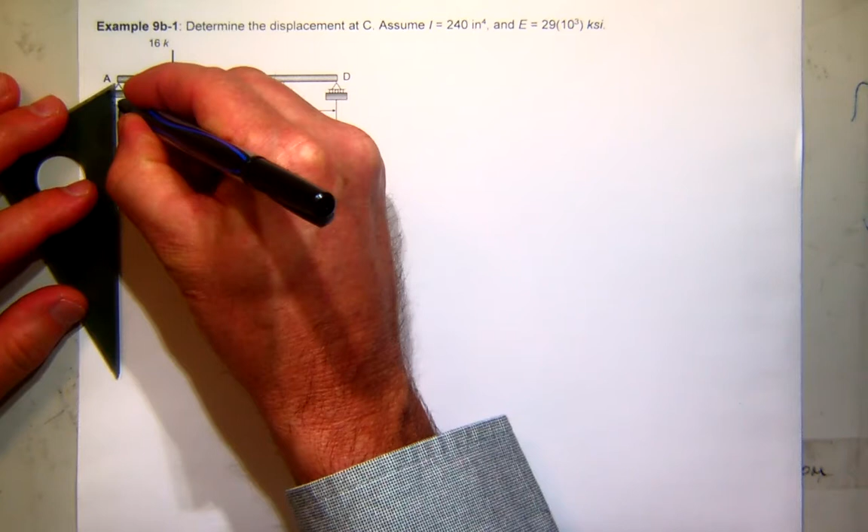So remember, if we're going to do virtual work for this particular problem, I'm going to have to write an equation for moment that's valid across the whole structure, and then a set of equations for the virtual load. So let's start with what I'll call the real moment first. So to find the real moment, I'm going to need some reactions. So let's start by assuming I have a value here for AY and DY. Let's find those reactions.

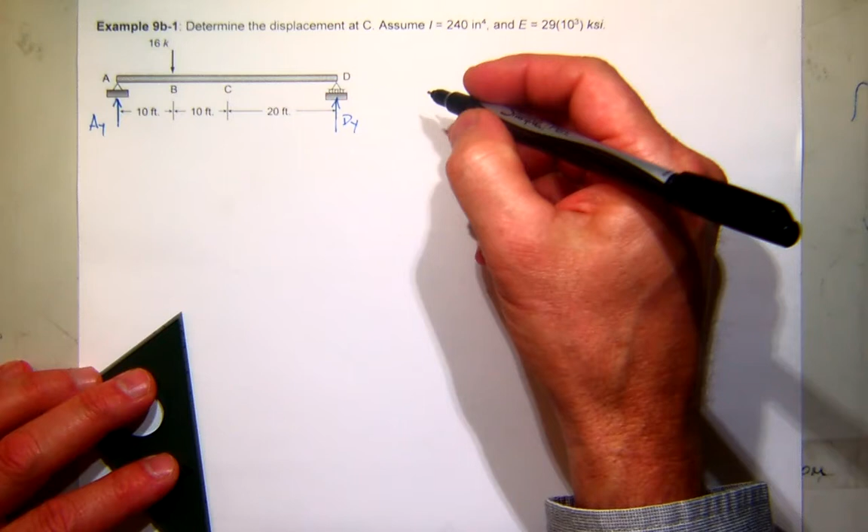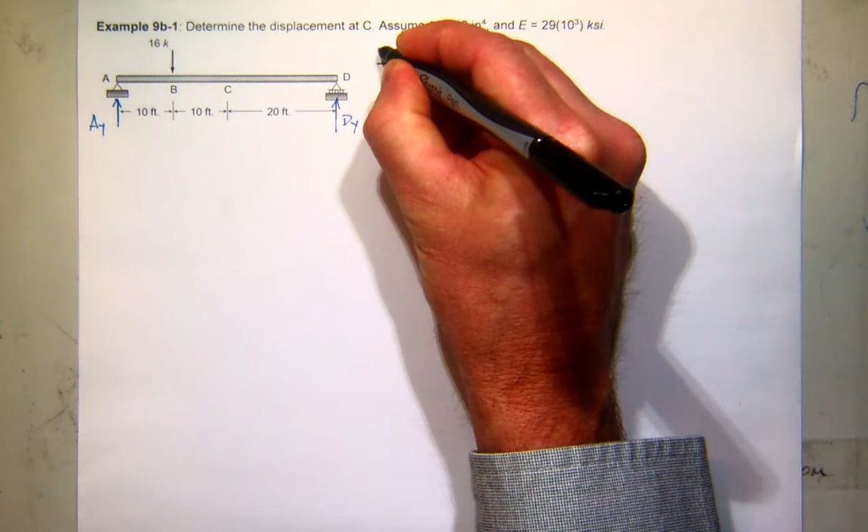So to find my reactions, I think I'll start by summing moments about D. That should help me find AY. And then we can sum forces in the Y direction. We can find DY. So first, if we sum moments about D, make sure we're in equilibrium. I'm using right-hand rule, so this 16 kip force creates what kind of moment about D? Positive. So I got a force of 16 kips and a distance of, looks like 30 feet.

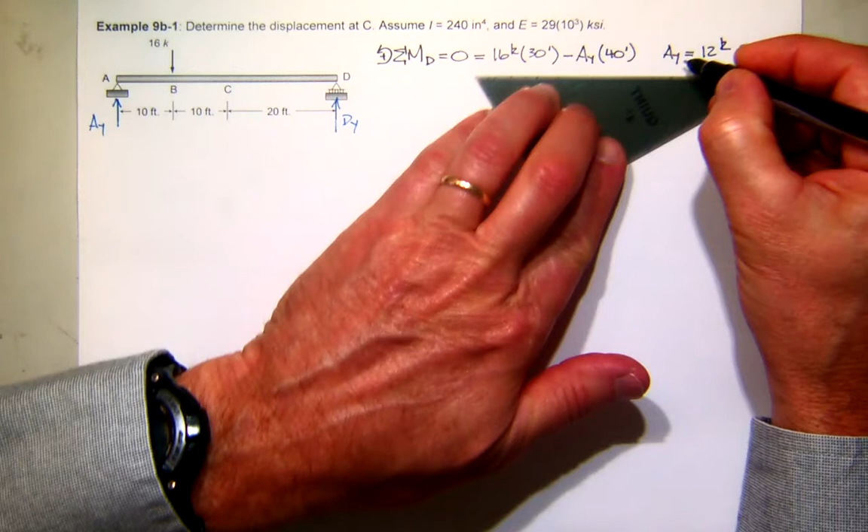And then my reaction at A creates what kind of moment about D? Positive or negative? Negative. So that's AY, and that has a moment arm of 40 feet. So it looks like AY is going to be 12? 12 kips. And then if I sum forces in the Y direction, I should be able to find DY pretty

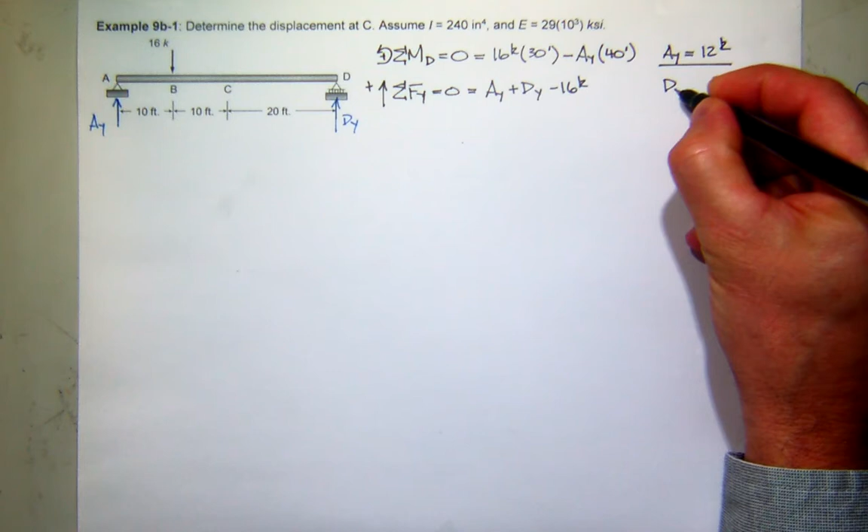easily. So again, summing forces in the Y direction, making sure it's in equilibrium. I assumed AY was up, that DY was also up, and that that 16 kip force was acting down. So it looks like DY is 4. Any questions about that? So next, now that I have all these reactions, I want to write equations for moment.

Can I write a single moment equation for this beam? No. So I'm going to need to write one that's valid from A to B, which is 0 to 10, and then a second equation that's valid from B to D, which would be from 10 to 40. Everybody see that? So I'll just call this section real moments. And we'll start with the first section. So this will be where X can go from 0 to 10.

So I'll cut the structure at some distance X in that range. We know AY, already solved for that. That was 12 kips. And then I'm also going to assume positive bending moment. So from that, I can easily find the internal moment. So I'm going to sum the moments at this cut that I made using method of sections. Make sure it's in equilibrium.

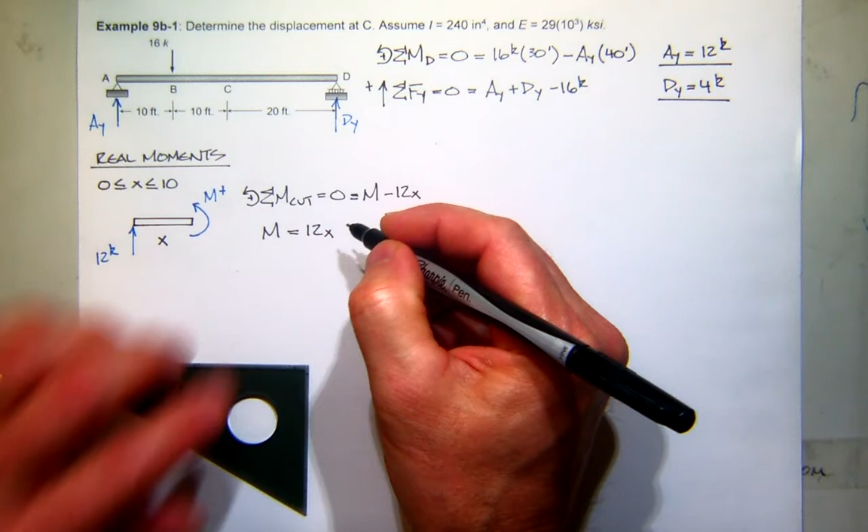The internal moment is positive, and the moment about the cut from the reaction 12 is negative. So that's pretty easy to find. Looks like the moment is equal to 12x. Any questions about that? Pretty straightforward. So let's do the next one.

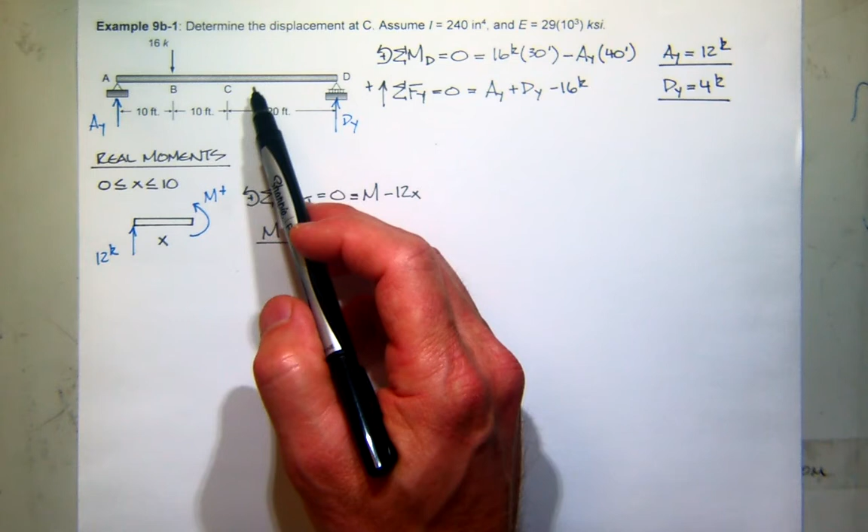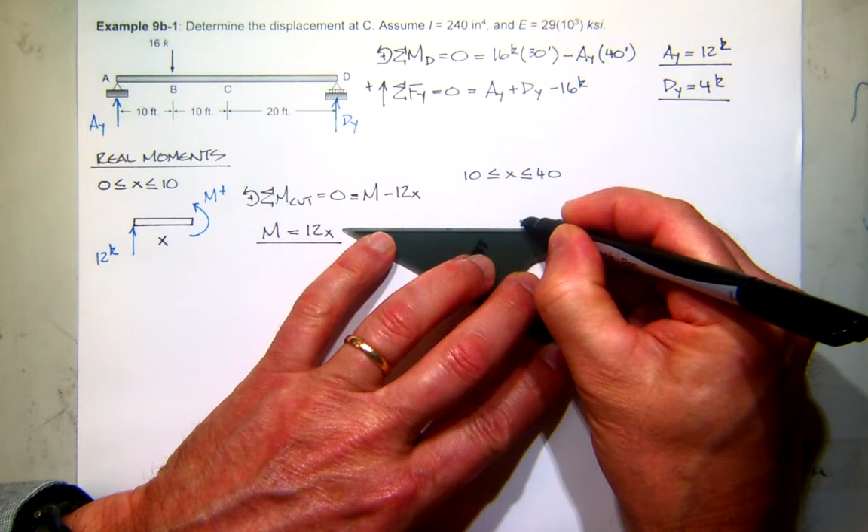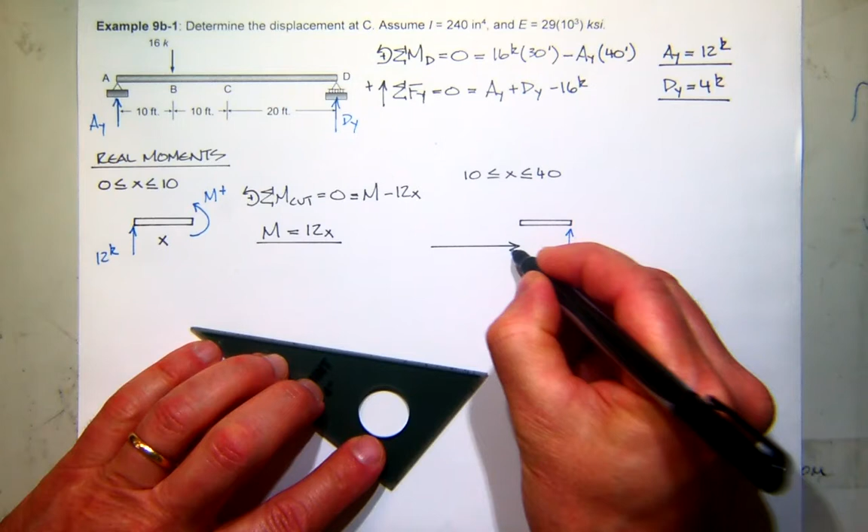Let's make a cut somewhere here between B and D. I think it's going to be easier to work the right-hand side. So this will be the moment that's good from 10 to 40. So again, I'm going to make a cut. That's the right side, so my reaction there is 4 kips. So again, the distance to the cut is x. So what's the distance of this little segment? The total length minus x, which is 40 minus x. And then again, I'll assume positive bending moment at the cut.

And I just need to solve for that. So again, I use method of sections. Now that I've done that, I'll just sum the moments at that cut that I made. Make sure it's in equilibrium. This internal moment with my sign convention is negative. And then this 4 kip reaction is going to create positive moment, 4 kips times a distance of 40 minus x. So solving for the moment, I'll just go ahead and run that through. So I'll end up with 160 minus 4x.

Now I can check these, right? I know the moment at 2 places. What's the moment here at A? 0. And that's at x equals 0. So I use this equation, and you can see if I put in x equals 0, I get 0. So that checks.

What about here at D? I also know the moment is 0. That's at x equals 40. So using my equation for that range, plug in x equals 40, you can see I get 0. Now the one other place to check would be at the point they share, which is x equals 10. So if I put in 10 here, what do I get? 120. If I put in 10 here, what do I get? 120. So I feel pretty good about these moments.

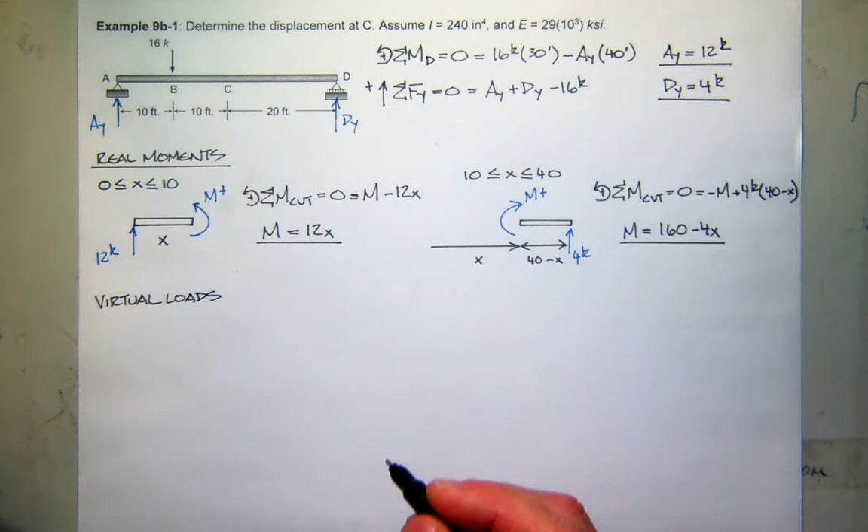So the next thing I need to do is my virtual system. Now to do my virtual system, I have a completely different problem to solve. So I'm going to first draw the frame. I'm going to have a reaction at A, just like I had before, and a reaction at D. But what is the load on the virtual beam? Remember, I'm trying to find the displacement at C, which is right here in the middle. So now I'm going to have a virtual load of 1 right in the middle of the structure. 20 feet and 20 feet.

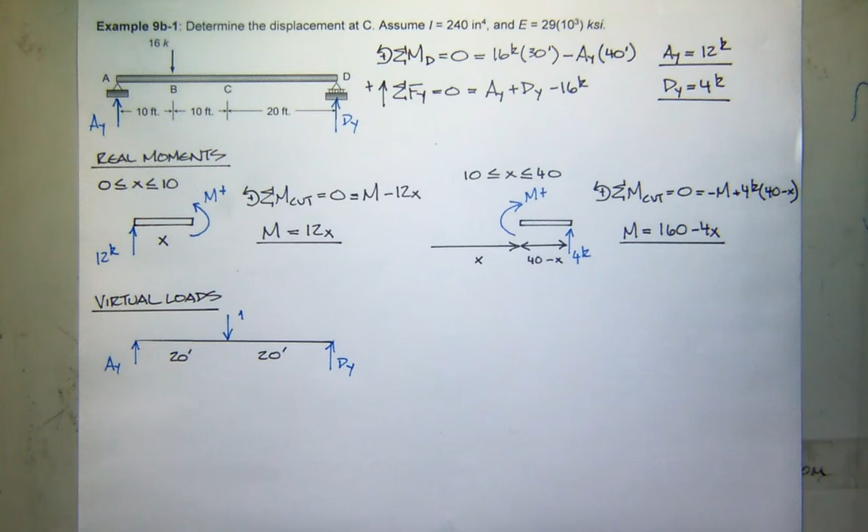Everybody see that? So how many virtual load equations am I going to have to write here? 2. One that's from 0 to 20, and a second one that's from 20 to 40. I'm going to follow the same strategy I did here. I'm going to cut in the first segment and use the left side, and then when I cut in the second segment, I'm going to use the right side. So I'm going to need both my reactions to get started.

I think we can probably already guess what the reactions are going to be. What do you think they're going to be? A half and a half. If you wanted to shortcut that and you felt good about it, you can. I won't do that. Just to be complete, I'll go ahead and solve the problem. So I'm going to sum moments about D, make sure I'm in equilibrium. And when I do that about D, the unit load 1 creates positive moment, and AY creates negative moment. And as we suspected, when you solve for AY, you do get 1/2.

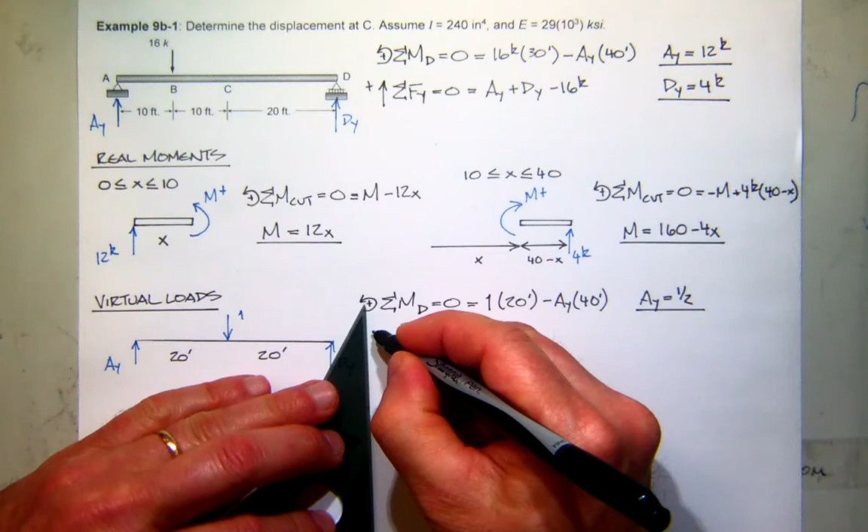And then if you sum forces in the Y direction for this free body, and also make sure it's in equilibrium, you're going to find that AY acting up plus DY acting up, 1 is acting down. And again, as we talked earlier, you find the reactions. So now that I know those, I'll follow through with the strategy we discussed.

So the first one will be looking for the virtual moment between 0 and 20. So I'll cut the structure, and we will look for the internal moment. Now this is the virtual moment, so I'm going to use the lowercase m. And then I know my reaction at AY is 1/2. It doesn't have a unit because our virtual load doesn't have a unit. And again, that will be at a distance x.

So when I sum moments at the cut and make sure it's in equilibrium, what do I get? Well, I have my internal moment, which is positive, and this force of 1/2 creates negative moment with a moment arm of x. So my virtual moment is just x over 2.

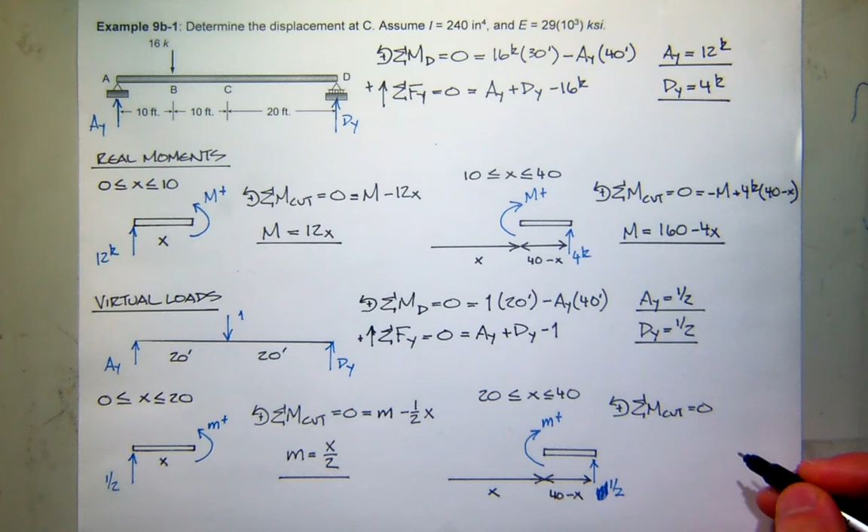So again, up to the cut from the left side is an arbitrary distance x. So what I'm left with on the right-hand side is the length minus x, which should be 40 minus x. And when I sum moments for this free body and make sure it's in equilibrium, what do we get? Well, we get the internal moment is negative. The 1/2 force creates positive moment about the cut, and it has a moment arm of 40 minus x. So when I solve for the internal moment m, I may just leave that 1/2 there. So I'll just say 1/2 times 40 minus x.

Now before we move forward, we can again check these. So in this virtual system, we should also know something about the moment at A and D. Do we know what's the moment at A? It's a pin connection. Should be 0, right? So if I put in x equals 0 here, I do get 0, so that's good. At D, which I know is a pin, I should also get 0 moment. That's at x equal 40. And again, if you come over here and you put x equal 40, 0.

Now these two share a value at 20. So when I put 20 here, I get 10. When I put 20 here, I get 10. So it seems like everything matches up. So I feel pretty good about my moments. So any questions about that? So really, you've done the hard work, I think. And now all we need to do is piece them together and form what I like to call the virtual work equation. So let's do that.

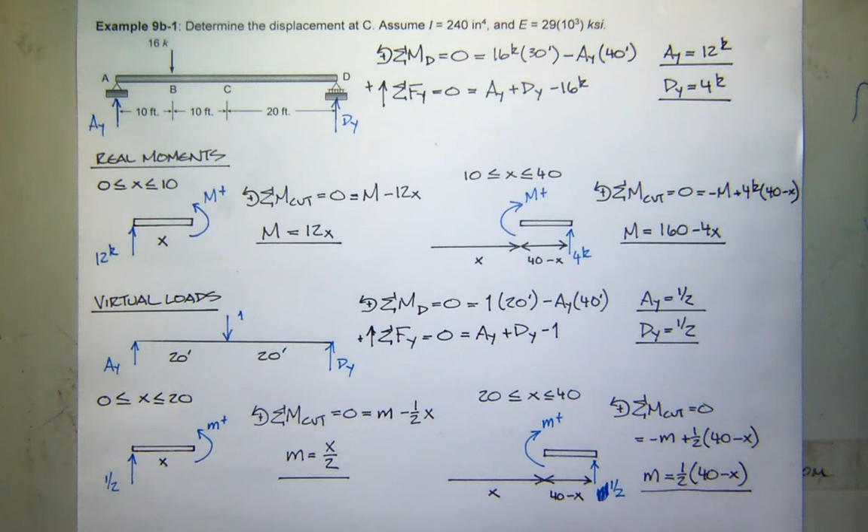Drop my pen. Hang on a second. Okay.

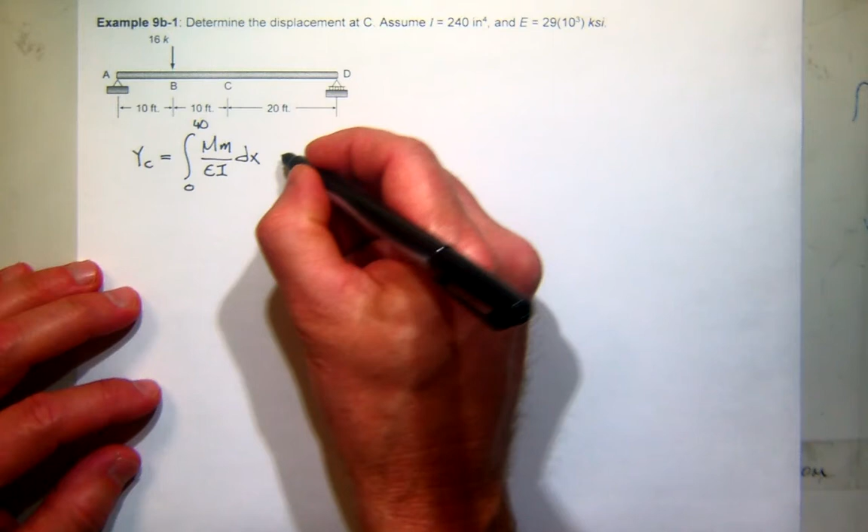So I'm going to flip this up. And so what I'm now going to write here is that our displacement y at point C is normally the integral over the entire length, which is 0 to 40, of the real moment times the virtual moment, divided by EI dx. Now, we can't do the integral over the whole length because our real moment varies and our virtual moment varies. Our real moment has one equation from 0 to 10 and a different equation from 10 to 40. The virtual moment goes from 0 to 20 and then from 20 to 40. So we're going to have to break this thing up into 3 segments.

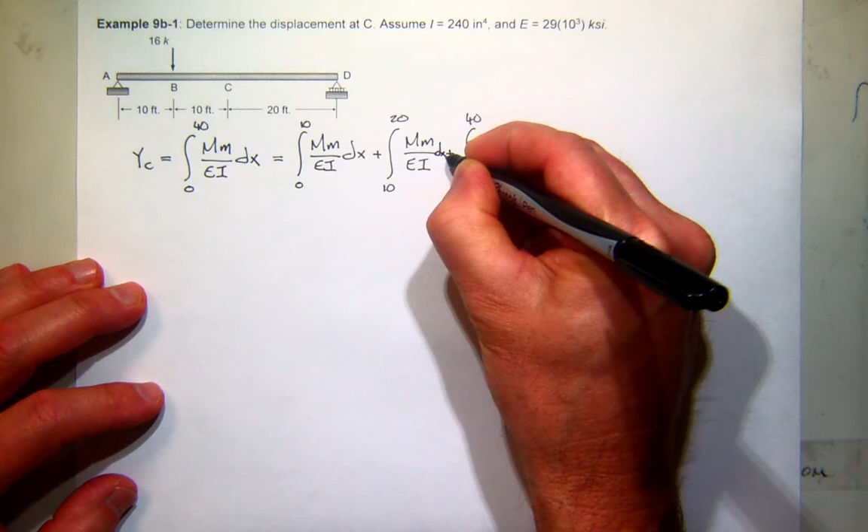So we're going to have the integral from 0 to 10. We'll have 2 equations for that, and then it'll change from 10 to 20. Why? Because the real moment changes. And then we have to stop at 20 because the virtual moment changes. But then from 20 to 40, the equations do not change. Oh, I left out my differential distance. So that's what we have to do. Kind of messy, but I think we can do it.

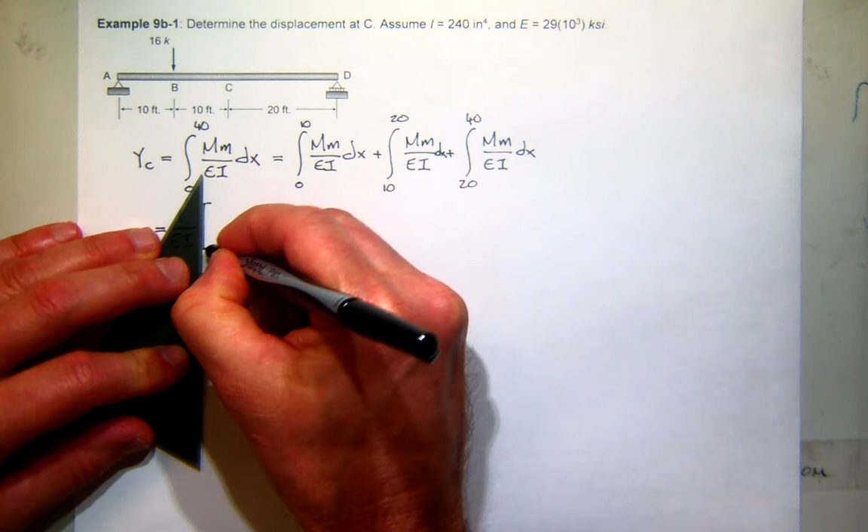So let's go back here. I'm going to go ahead and factor out the EI and put it up here on the front and say that that's going to be multiplied by the whole thing. So the first integral from 0 to 10, let's see, my real moment is 12x. My virtual moment is x over 2. So I've got 12x times x over 2 dx. You can see that's not going to be very hard to integrate.

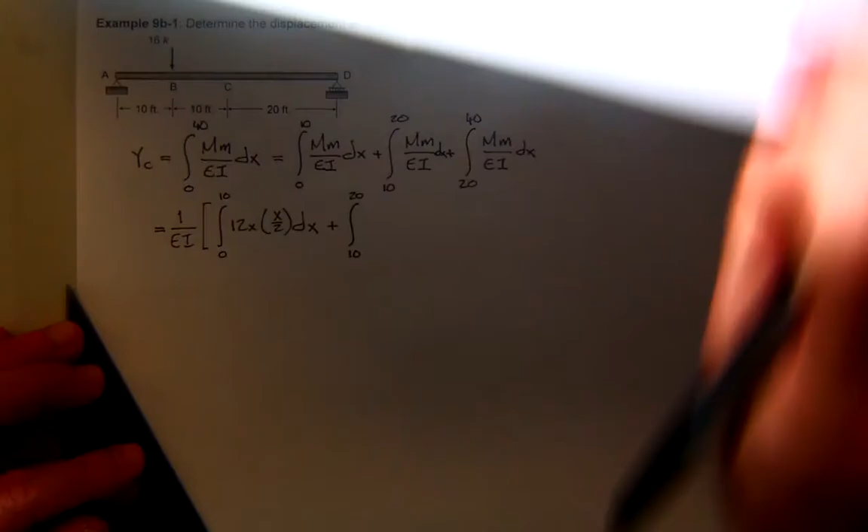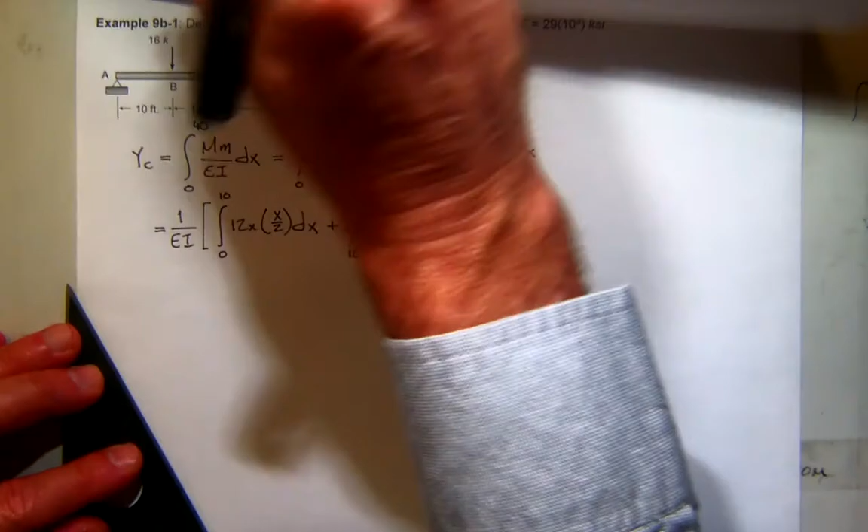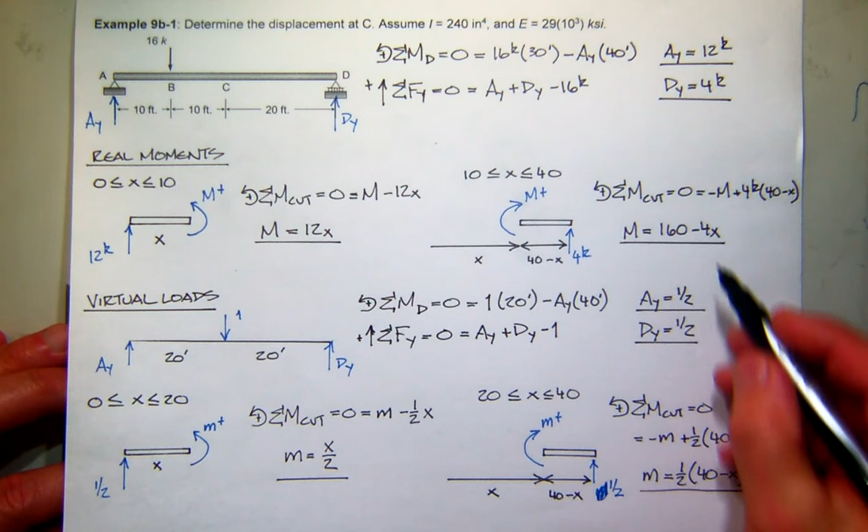My second expression from 10 to 20. So now this is my real moment, 160 minus 4x, but this is still valid for my virtual moment. So I'll have 160 minus 4x, and the virtual moment is unchanged. And then the last piece goes from 20 to 40. So this is my real moment, 160 minus 4x. This is my virtual moment. So I still have 160 minus 4x.

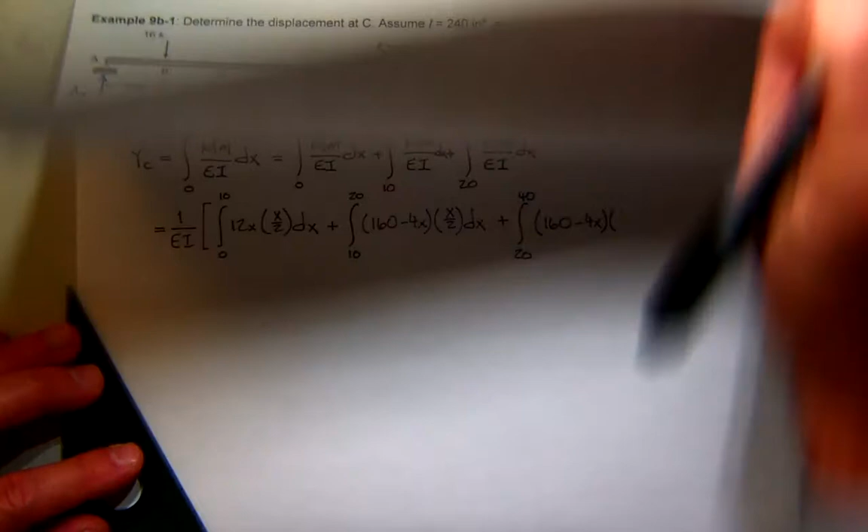And then I get, what was the virtual moment again? I'll have to flip back, I lost it. 40 minus x and a half. So it's got 40 minus x. I'll put the half up front, dx, and then I'll close up my bracket for the divided by EI.

You can see why on an exam, this would be good enough for me. You can just stop here. Because you could spend a lot of valuable time on the exam just doing all these tedious calculations, and there's so many places to make little mistakes along the way. So for me, most times, this is good enough to stop. So anybody have any questions about this?

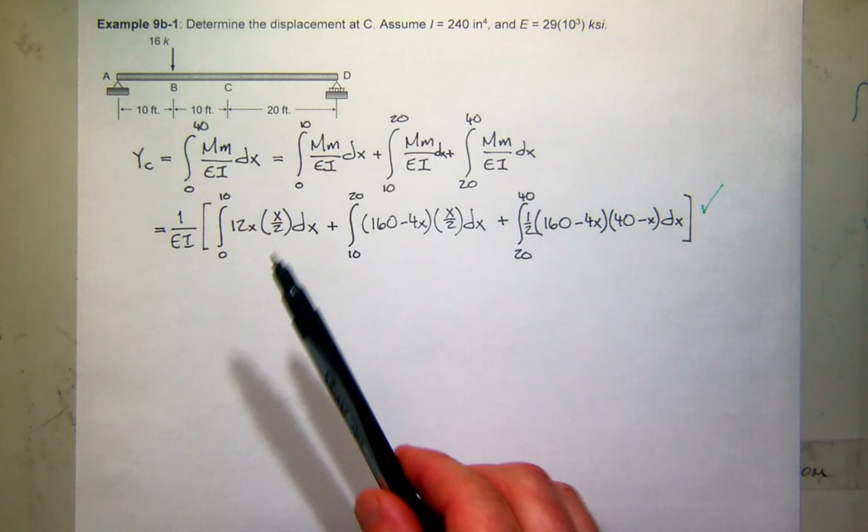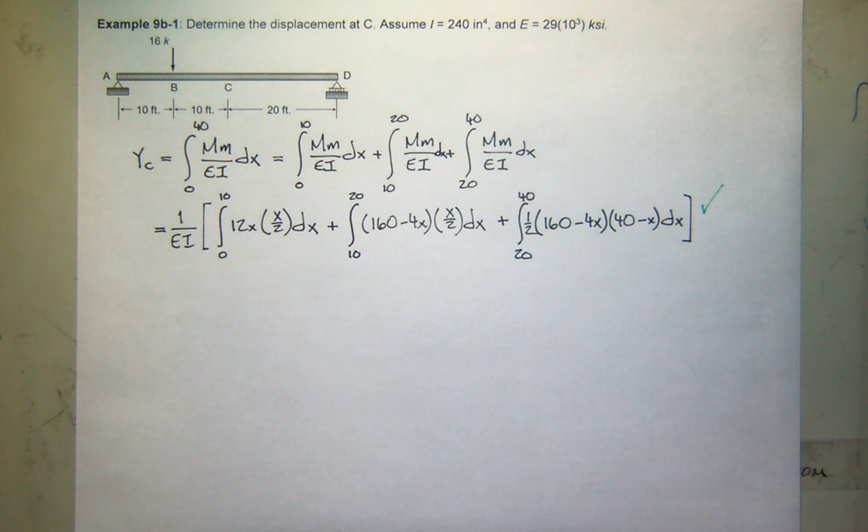What I'll do, I'll go back in my office and I'll actually do these calculations and divide by EI and give you a numerical value. So when you see this online, in the PDF of this, you'll see the solution. If you choose to look at the video, it would stop pretty soon at this point. All right.